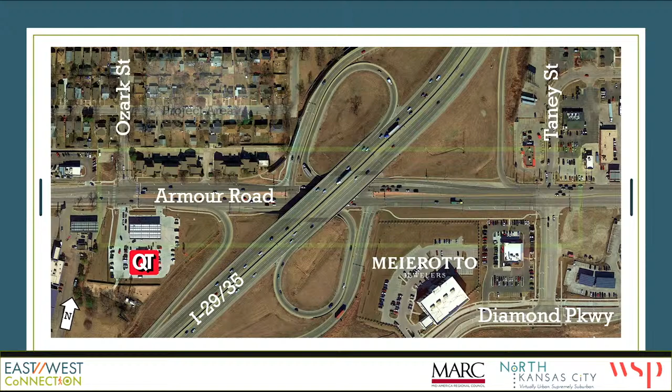This is our project area. So we are this section of Armour Road from Ozark to Taney and focus solely on the interchange area going under the bridge, not really on the whole interchange. We were looking at the ramps, we weren't looking at the main line of I-35. But just that part under the bridge on Armour Road.

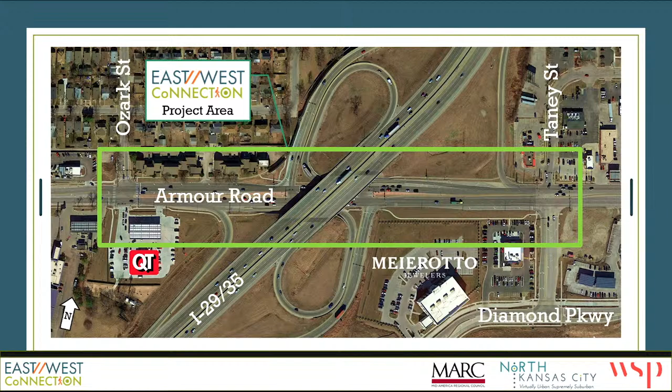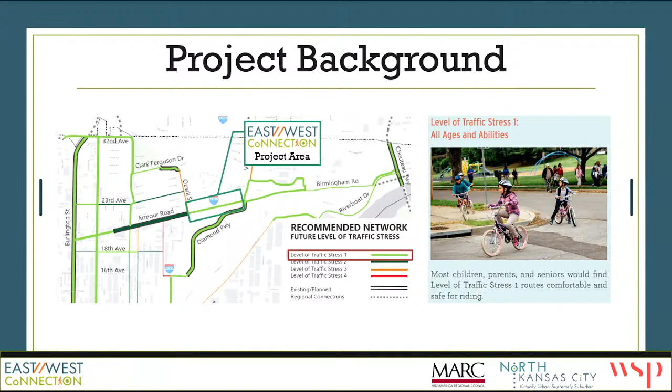A little background of why we're here. I think many of you will probably recall the bicycle master plan that was done a few years ago. This section under I-35 was identified on this low-stress network, a desire for facilities that anybody, kids, unskilled or unsure adults riding, biking, walking, can get under the bridge to reconnect the city across this major barrier. So you can see our project area right there. In the green is that level of traffic stress 1 facility for all users.

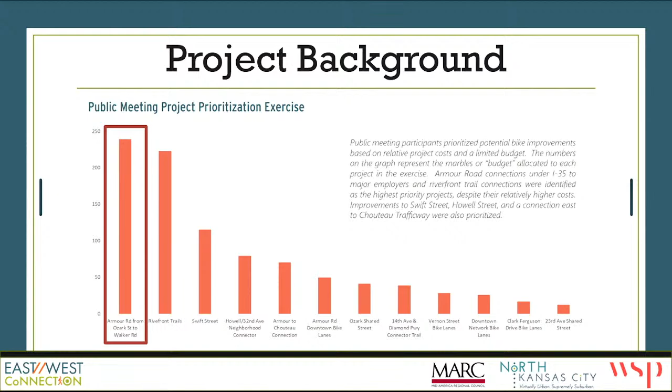As part of that project, we asked the public what were the priorities, and the bar on the very far left is this project. This is the connection under I-35. It was rated as the #1 priority project in the city by the public through that process. And that's what really led to kicking off this study.

There's been a lot of history in the study area. 2006, sidewalks were added on the north side. Prior to that, there were no sidewalks at all through the interchange. 2008 to 2011 was a reconstruction of the ramps. There was a major reconstruction of the interchange. There were a lot of safety issues out there. It used to be a full cloverleaf interchange, like a system interchange would be from one highway to the next, and then they changed it to be more of a traditional urban interchange with traffic signals.

In 2017, Diamond Parkway was reconstructed as part of the Armour Road redevelopment area, and the cycle track was built there. At the same time, sidewalks were also added on the south side of the road, so we do have sidewalks on both sides, which is a major benefit to the area.

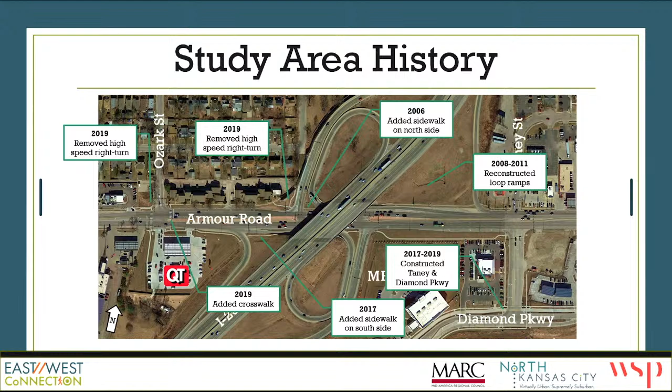And then in 2019, as part of the QuikTrip redevelopment project, the high-speed right turn lane for the southbound ramps was removed. Again, that was another big safety improvement for the area. Also removed the high-speed right turn at Ozark coming onto Armour Road, and then added the crosswalk on the east side of Ozark. Prior to that, there was only a crosswalk on the west side of Ozark crossing Armour Road.

Especially concerning were the uncontrolled right turns, where a pedestrian has to cross high-speed right-turning traffic with no traffic control, very little signage. Obviously, the narrow nature of the sidewalk under the bridge. It's good that we have sidewalks at all. There's a lot of interchanges that don't have sidewalks, but they are very narrow.

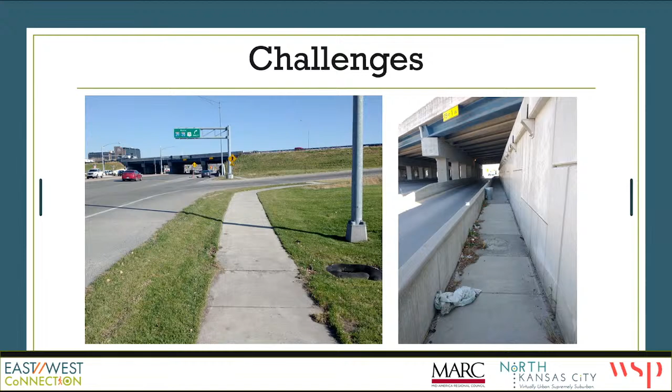There's barriers on both sides that make them feel even more constrained, and there's a lot of debris and trash and other things on the sidewalk under the bridge that make it challenging. I think there's actually a trash can in that picture, really small if you look, so there's maybe some grassroots efforts to manage that out there.

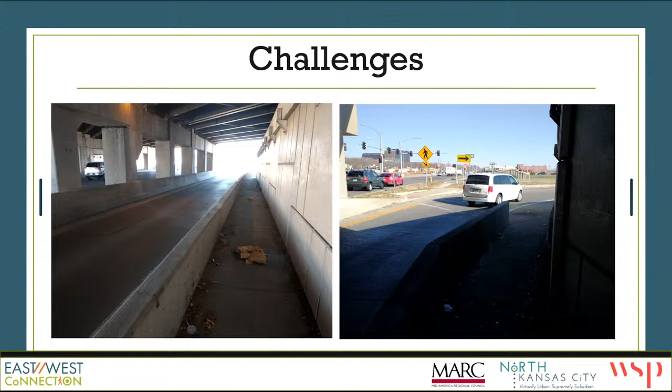Another really big issue is where the pedestrians cross those right turn ramps onto the interchange. It's very dark under the bridge, and the crosswalk is directly in the sun for the most part when you exit the bridge, so you can see in that picture on the left how bright it is when cars exit, and on the right exactly where that pedestrian crossing is. It's on the turn, it's behind the barrier, it's right when you get out in front of the bridge, so it's very challenging from a visibility perspective.

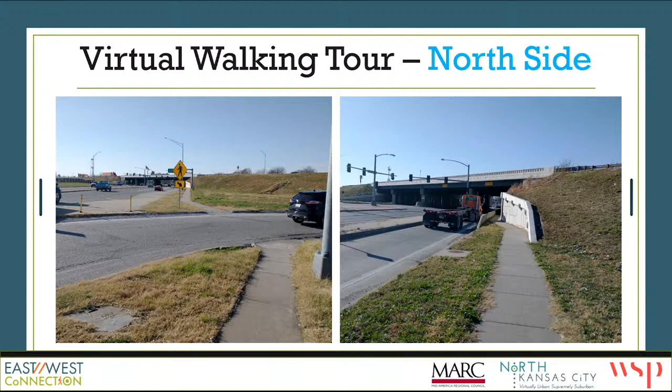Same issues on the east side. Those were pictures from the west side, primarily on the south. These are from the east side and on the north, similar issues, the right turn lanes and the narrow constrained corridor.

So we did a good bit of outreach for this. We convened a focus group. We met with them twice, and we also did a public survey. So we first met with that focus group July 21st, 2021. We talked to them about improvement options, how to prioritize those improvements.

We took a lot of those improvement options, had the public survey September 21st to October 21st, 2021, 229 responses, had very similar feedback to what we heard from the focus group. Everyone was really on the same page with what they were interested in and the issues that were out there. And then January 25th of this year, we presented the various concepts to the focus group again, asked them their input, and then brought that into the concept planning process as we finalize the concept.

This is just a list of the focus group members. I think we had really good engagement from them, a lot of great feedback, and a very good group to work with. The first meeting, we asked the focus group if they've walked or biked under I-35 to describe their experience. I think this probably mirrors your experiences if you've walked or biked under there. Word cloud, obviously loud, unsafe, and scary come to the top there. So not a particularly pleasant experience.

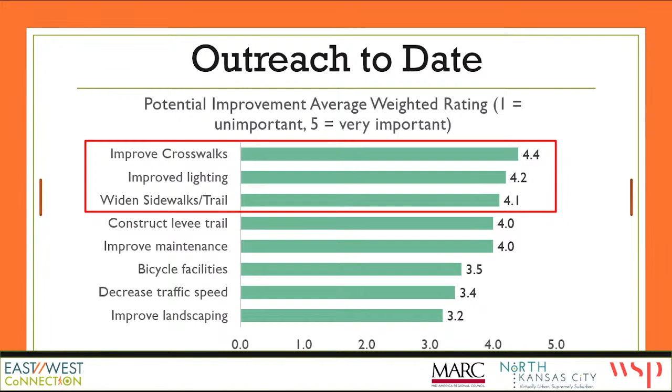So we had the focus group again in January. We had a lot of concepts, which I'll go through in just a minute. We asked their feedback on those concepts, got some really good input. And again, their greatest desire was really to get that shared use path or widened sidewalks or trails, what have you, built through the interchange. But really a place where cyclists and pedestrians can get through the interchange comfortably and safely.

And they really were very focused on making sure any path down there was physically protected from traffic. So they didn't want just a sidewalk with a curb and gutter next to it. They really wanted something that had some kind of a physical barrier, a jersey barrier, or a crash barrier in between the sidewalk and the traffic.

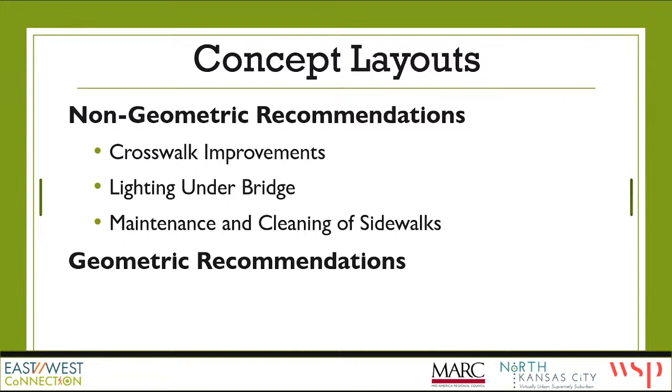So that gets us to our proposed options. These were the things that we primarily focused on: crosswalk improvements, lighting under the bridge, and maintenance, cleaning of sidewalks are things that we will note as very important. I'm primarily going to go through these geometric recommendations, though, in terms of how the road or the sidewalk could look differently.

So we did also do a traffic analysis. A couple of the options changed how the traffic would flow. One of them looked at putting pedestrian facilities where the current right turn ramp is, going behind the columns, so at the very outside of the roadway, adjacent to the current outside walls. That would change how the traffic got onto I-35. It would make a big impact to that traffic, so we analyzed that.

Another one of the options: right now there are 3 eastbound lanes under the bridge. There used to be 3 westbound lanes under the bridge as well, but those were converted to 2 westbound lanes under the bridge a few years ago by MoDOT. And one of these options would also convert the eastbound lanes from 3 lanes to 2 lanes and match that same cross-section that's on the westbound lanes today. So there would be a reduction in one travel lane under the bridge in the eastbound direction.

We did a lot of simulation. We did a micro-simulation model using the Vissim software. I think you all have probably seen this in the past, but it models traffic in a very natural way, in that it has a distribution of driver behaviors and models them actually driving through there. So we can tell the differences, especially with closely spaced intersections where they interact with each other a lot.

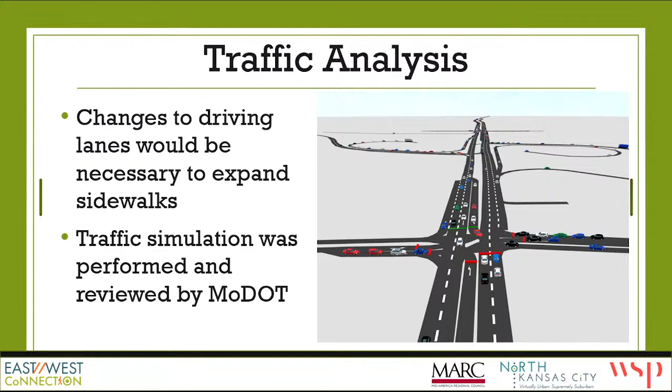We did a simulation. We reviewed this with MoDOT. MoDOT's very particular about these types of simulations, so we worked with their engineers to make sure they reviewed it. They were comfortable with how it was set up and what the results were. And those results were essentially that these different options we looked at had really no change to the traffic.

So this shows the level of service at the different intersections. On the left, Armour and Ozark. Then going to the right, we have the I-35 southbound ramps, then the I-35 northbound ramps, which would be on the east side of the highway, and then Armour and Taney. And with the changes to the traffic, the reduction in the one lane, or the removal of the free right turn ramp, there was really no change in the level of service out there.

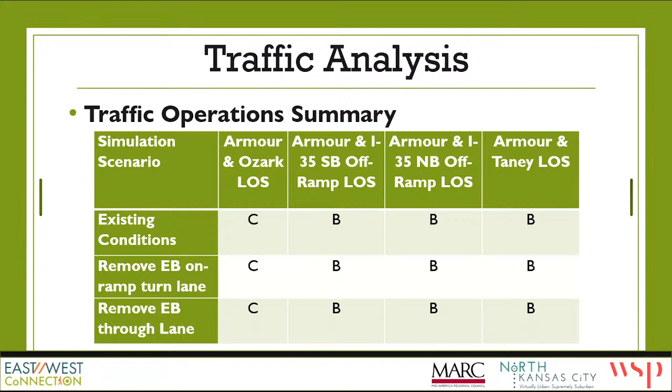So the concepts that we explored with the focus group for this path were 3 primary concepts: looking at the ramp, the path that goes south of the bridge columns where that right turn lane currently exists, that we figured could be built as a 16-foot wide path, barrier protected, and then looking at a 10-foot wide shared use path in the outside eastbound drive lane today. So that would be the reduction from 3 lanes to 2 lanes in the eastbound direction, and then would use that extra space for the trail. And then a very similar thing on the north side of the road, using the westbound lane.

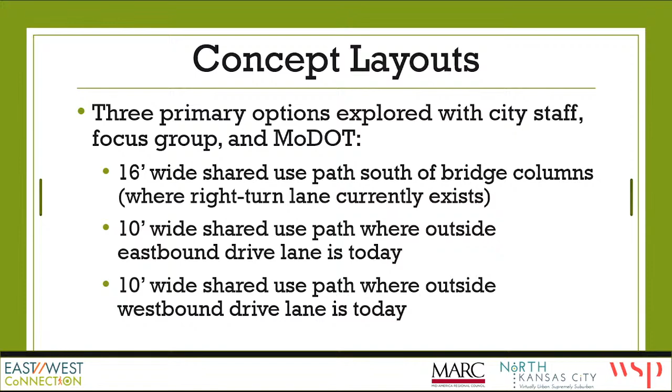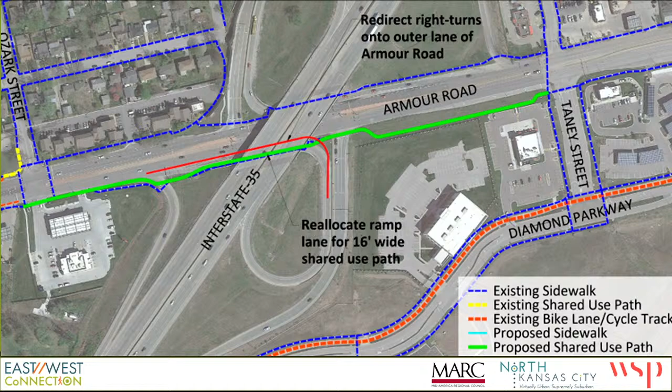There's some space that was actually given back in the middle of the road where there's an expanded island there that would be swapped to give that space back to the outside of the road. So this is that first option, that 16-foot ramp. The traffic today comes back here behind the bridge columns and makes the loop onto I-35. That traffic would then use the outside lane, make a right turn, more similar to a typical interchange, right onto the ramp, and then this shared use path would go behind the columns there.

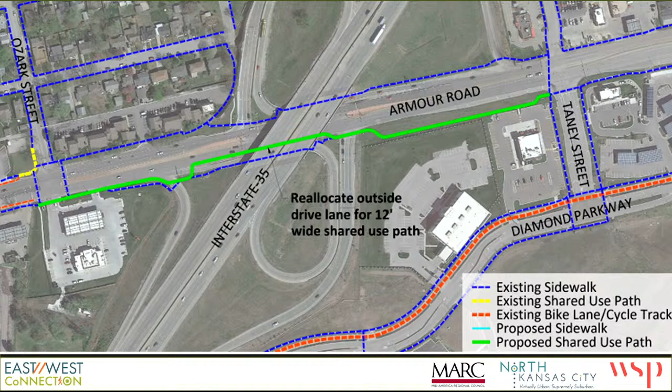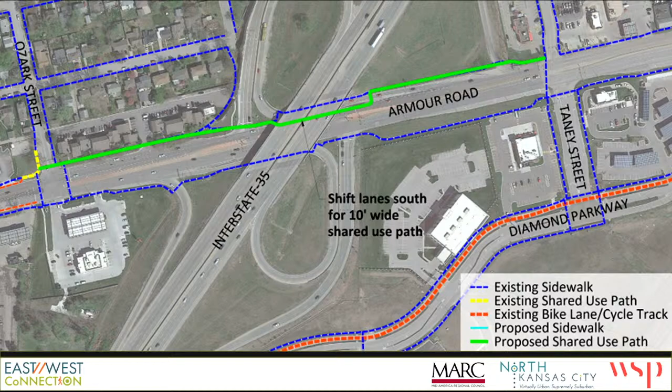That next option, again, keeps that right turn lane intact right here, and then this would cross that right turn lane here and use that outside ramp space for the shared use path. And then the other side, something very similar, crossing the ramp at this location before you go into the bridge, and then coming in that outside roadway space. So when we talked to the focus group, they really preferred that 16-foot shared use path behind the columns. They were very excited about the fact that it was protected. It had a lot of room.

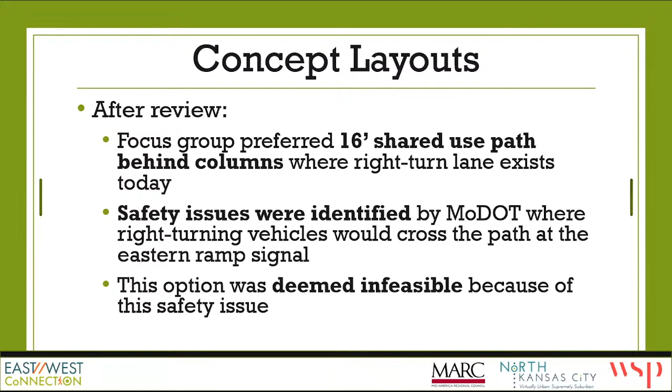Unfortunately, though, when we went to MoDOT to talk through this, they identified some safety issues with that, primarily where the pedestrians would cross the ramp. There's a bridge column very close to that, so it'd be very difficult for drivers who are turning right to see pedestrians or cyclists in the crosswalk entering the roadway there. They initially had a concern. We did some more calculations. We found that would be the case, that would be a sight distance issue and would create a potential safety issue. So we really deemed that infeasible because of those issues.

The focus group did not prefer those 10-foot paths adjacent to the travel lanes, but a lot of their concern was with the fact that it was a little narrower and the fact that what we originally showed, because we hadn't done the engineering investigation, had no barrier between that path and the driving cars. So you'd be directly adjacent to traffic with just a curb there, and they had a lot of concerns with that. So we went back, talked to MoDOT, did some more investigation, and the preferred concept does keep the shared use path in that space, but it is 12 feet wide and it is protected by a barrier from the traffic. So there's space for a jersey barrier there and a 12-foot trail.

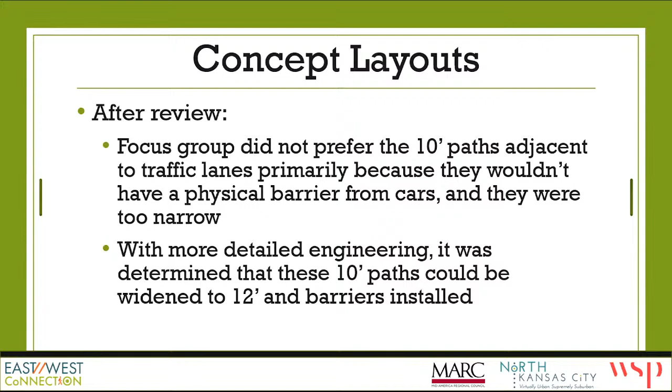And actually there's probably a little bit more space in there because there's another foot or two before you hit the bridge columns. So it might ultimately become 13, 14 foot wide in total space you could have under the bridge. So we felt that this option, because it did provide the barrier protection and it provided the wider path that the public or the focus group was interested in, would be a good option to present to you.

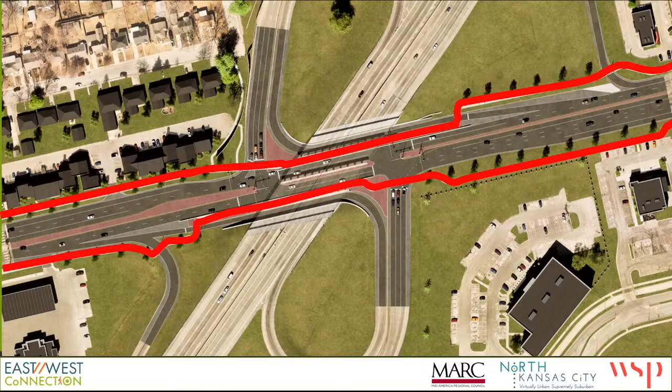So this is a top-down view of that option. You can see those trails as they go through there are continuous, and where they have crossings, I'll show a few renderings of exactly what that looks like so you can see a little more detail. This is just a bit of a zoomed-in view. So you do cross those right turn lanes, those ramps, at these locations. One thing to note is that the crossings at the right turn ramps are in much more visible places. They're before you go into the bridge, so they don't have that same issue with driver visibility of it being dark under the bridge and emerging. And you do have a lot longer sight line to those crossings.

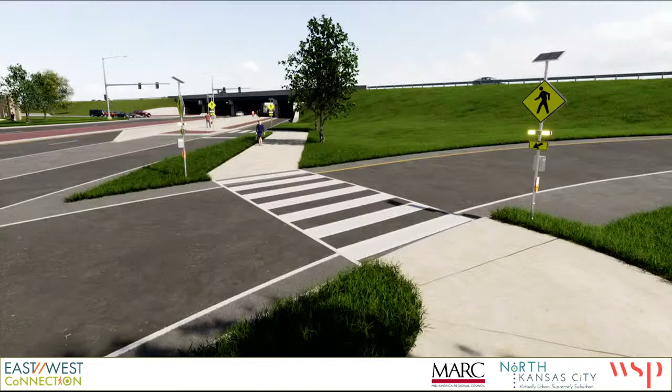So these next couple slides just go through some images, some renderings showing what this looks like. So this is a view as you walk past QuikTrip and you come to that first ramp. So we do have that crossing. We are recommending something I think you all will appreciate, the rapid rectangular flashing beacons that we've discussed in the past. That would be proposed for all the crossings.

So there is very visible signage and a bright flashing beacon. So as the pedestrians cross, they will have that, and those right turning cars will have a lot more visibility into the pedestrians making that crossing.

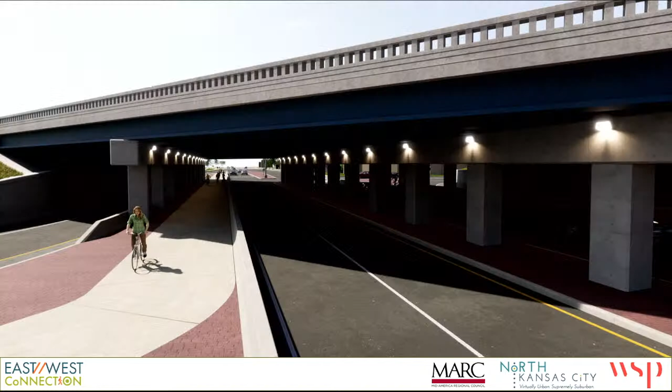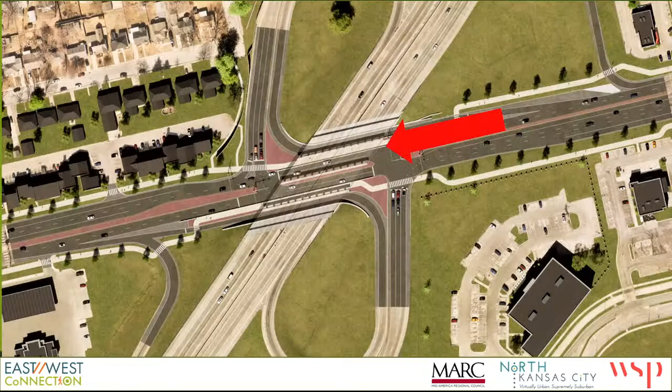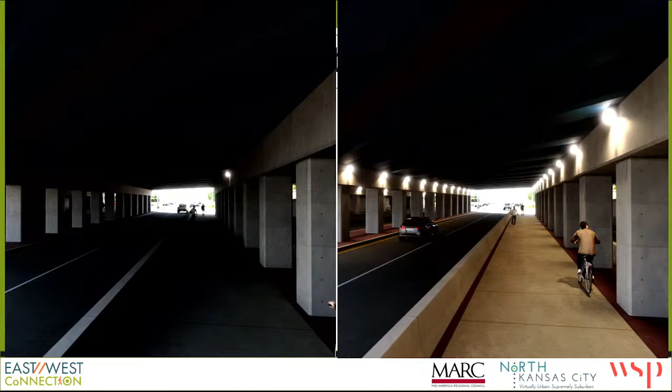And one thing I did want to note, we did look at the lighting options. That was something that was very important to people. We felt that it was very dark under there, both in the day and at night. And so what we did is we rendered that with pretty photorealistic techniques for the lighting, and show on the left what that would look like with the lighting that's out there today. There's just one set of lights in the middle of the bridge. This is typical bridge lighting standards.

But after we looked at it, because of the length of the bridge, because there are no openings in the bridge, there's no space in the middle for any light to penetrate, it really should probably be built with tunnel lighting standards. And those tunnel lighting standards are what we show on the right side there. So you can see much brighter, even with the daylight there, and then at night it should be quite bright. So is that work MoDOT would do? We'll get to that in a little bit.

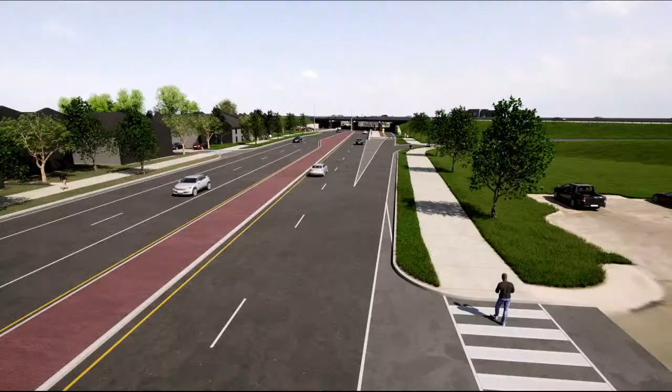Nice. So just to wrap this up, we do have a few videos here. This is starting from QuikTrip, going to the east. You can see how the ramps are there. You see both of those crossings of the right turn lanes, and how that looks under the bridge. Again, notice the 2 eastbound traffic lanes there instead of 3. That third lane is traded for the barrier-protected 12-foot sidewalk.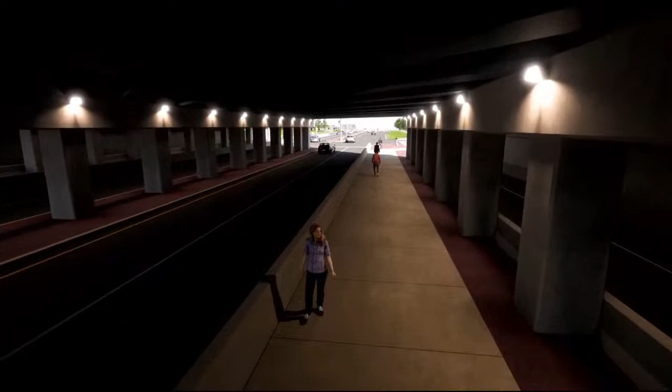And again, you can see there is a little bit more space on the right side of that trail today. We don't have actual survey on this for doing this design, but we're fairly confident in the dimensions that we have in there. And then exiting the bridge, the MoDOT fence is on the right there.

And then this is from the east side looking west, so drivers traveling in the westbound direction, and the trail on the north side of Armour Road there. A nice wide trail. You can see the crossing from a very long distance away in a very visible spot with those rapid rectangular flashing beacons, the safety beacons, the warning beacons for pedestrians, and again, the same 12-foot wide trail.

Well, if I can figure it out, I might just have to restart it. How about that? I'm just glad the videos actually work in my PowerPoint, so.

Understood. They actually just touched on one of the questions I had, which was the flashing beacons. Are they push button operated? That's correct. And are they on timers? Yeah, they flash for a certain amount of time. It's not a sensor, so if you're on a bicycle, you have to push the button. It doesn't sense you coming and automatically flash.

Yeah, that's correct. They're a lot less expensive than a traffic signal installation, and as such they do have the accessible push buttons for handicap accessibility, but they don't have any smart sensors or cameras that could detect someone there. So it is truly push the button - the pedestrian has the option to push it or not. If there's no cars there, they can feel comfortable to cross. If they don't feel comfortable, they can push it, and it will flash for a set amount of time based on a low walking speed.

And it isn't a legal requirement to stop? Well, it is a legal requirement to stop for a pedestrian in a crosswalk, but if that's flashing and there's no pedestrian there, then the cars can proceed.

Okay, makes sense. Is your presentation over, or are we interrupting you? No, this is fantastic - I think one of my next slides was questions. I have one other question, but I didn't want to derail you if you were still in the middle of your presentation. The other thing I had was debris and trash.

So the debris and trash is something we'll discuss. I believe there is a maintenance agreement on the books right now for North Kansas City to maintain the sidewalks under the bridge. I think that was part of the agreement with MoDOT to build those sidewalks, so technically that is on North Kansas City's budget, I believe. I think there should be some review of those agreements to make sure who has actual obligation to maintain that.

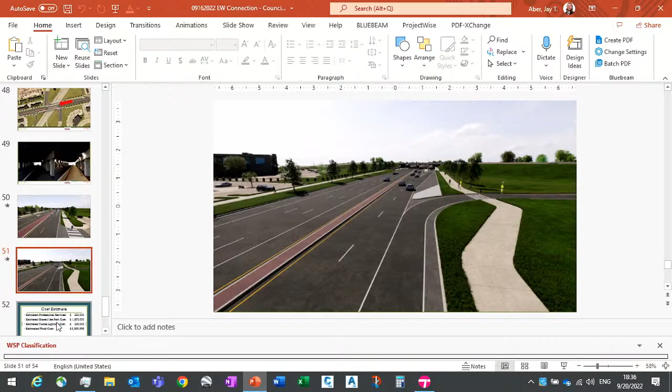So I'm sure you're all wondering the $2.52 million question: how much will all this cost? We did put together cost estimates. Keep in mind these are based on conceptual plans, and we're in a state of inflation right now, so it's anybody's guess what prices will be next month or year. But we provided a contingency, so we think this is pretty conservative and reasonable if constructed in the next year or two. But obviously no guarantees are made.

So we do have separated costs for professional services, further traffic modeling, design services, coordination with MoDOT, and getting survey. We need actual survey under the bridge to get these dimensions right. There are some issues with stormwater down there, with interesting placements of catch basins that would have to be investigated. So that's $320,000. The shared use path cost is $1.87 million.

That is for both sides of the road. This could also be built in a phased manner — you could build one side and then the other later, but that's the cost for both sides being built. And then we broke out the tunnel lighting cost as well. That's something that could be built now or later, and that's $330,000. So the total, $2.52 million, is our best guess estimate as of this time.

Can we do the bottom two and do professional services later? It might be a bit challenging.

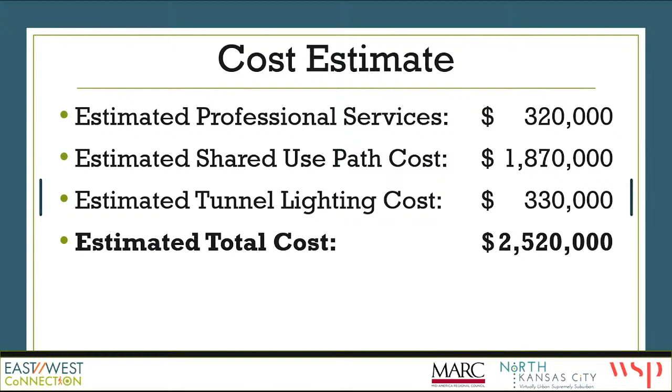I think that will come down to negotiations with MoDOT. It does fall under the tunnel lighting standards. There might be some question of whether this is considered a tunnel because it's skewed in the different configuration of it. My feeling is if the city does push and really wants this, that most likely they would require the city to build and maintain it. But that could be part of the negotiations that go on with MoDOT.

Thank you. Councilmember Patel. And who is currently responsible for keeping the area clean under the bridge? As I mentioned, I do believe that the initial agreement to build the sidewalk made North Kansas City responsible for maintenance of the sidewalk. So it's already an ongoing cost for us. So if we did upgrades like lighting and brought people in, it might be a lower cost and more effective at keeping it clean? I think that's possible.

You would have more pavement. The sidewalks are wider. You have the rapid rectangular flashing beacons that do have electrical service to them. So you're correct. There is a maintenance obligation there today. There may be a slightly expanded maintenance obligation, but it wouldn't be a completely new cost.

And the only other thing I'll comment on is the fencing for trash, I think is a good idea for trash. I worry about visibility though, because to me, having people out and about on their bikes and walking, the safest thing you can do is be able to see everybody. So I would be concerned about cutting off the visibility.

I was going to ask about the maintenance agreement. This one's probably for Anthony here, since I know he's found that agreement. Is that just on the south side sidewalk, or is that the entirety of underneath the bridge? And you can come on up to the microphone here, so everyone else can hear you too. I think the way ordinance 8998 reads is it's just for the south side. Just south side? Yeah. Because that occurred due to the sidewalk extension, it had nothing to do with the north one. Yes. Okay, thank you. And do you think the tiny street sweeper could fit on the shared use path? Yeah, I think it could, yes. Definitely, yeah.